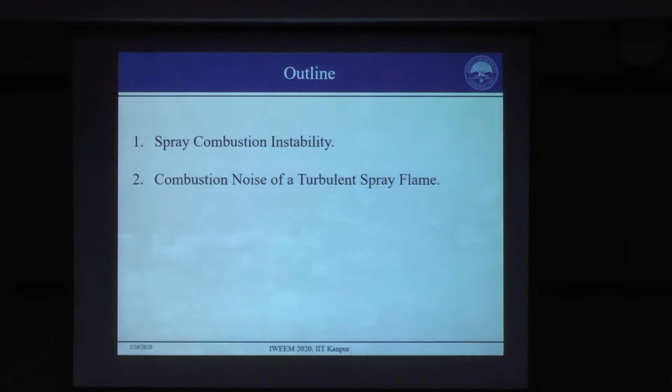So today I'll be talking mainly about spray combustion instability. And if time permits, I would like to slightly touch upon the topic of direct combustion noise from turbulent spray flames. So I'll give you a brief background on our research.

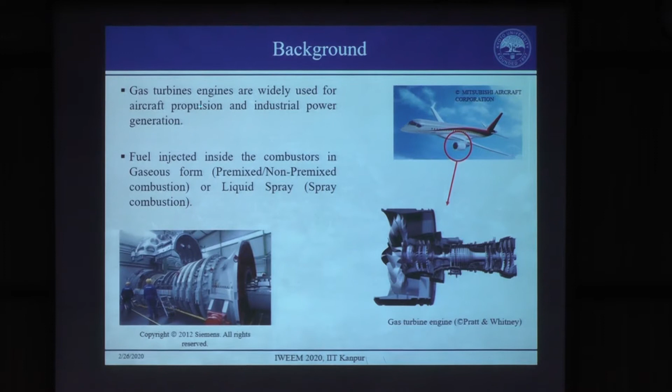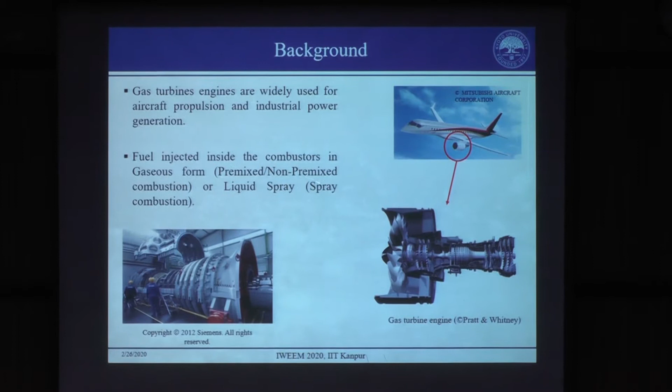As you might be aware, gas turbine engines are used for applications of propulsion and power generation. In the combustors of these gas turbine engines, you can inject fuel in a gaseous form, leading to premixed or non-premixed combustion, or you can directly inject liquid fuel as a spray. But when you have turbulent combustion inside the combustor, it is often accompanied by what we call combustion noise, which is a byproduct coming from the heat release rate fluctuations occurring inside the combustor.

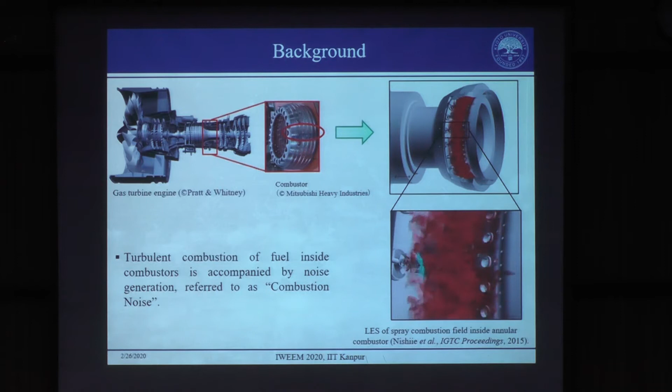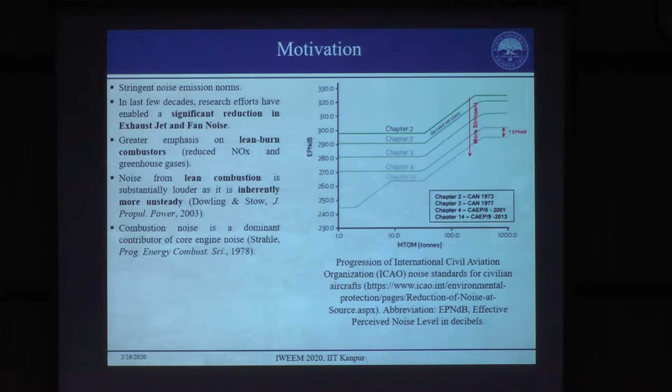Another issue is that, to keep in line with these norms, researchers have invested a lot of research to reduce the other noise sources from engines, like the jet noise and the turbo machinery noise, such as fan noise. A lot of research has been done to drastically reduce these noise levels.

This problem is further aggravated by the introduction of what we call lean burn combustors, because we want to reduce NOx and other emissions. So we introduced these lean combustors, but the problem with lean combustion is that it is inherently more unsteady, and it leads to more noise.

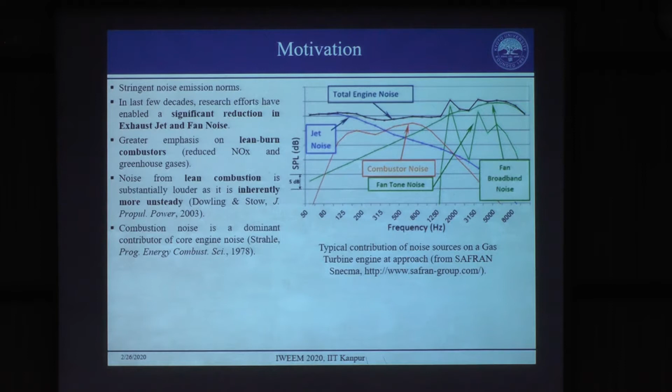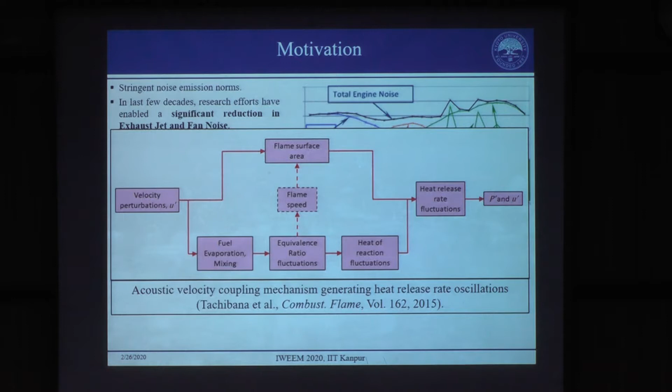And it's not just the noise. The problem arises when you have a coupling between the acoustics of the combustor and the heat release rate fluctuations. Here I've shown a schematic which shows the two pathways by which the coupling can occur. Once there is a suitable phase relation between the heat release rate fluctuations and the pressure perturbations, the self-excited oscillations will grow and lead to what we call thermoacoustic instability or combustion instability.

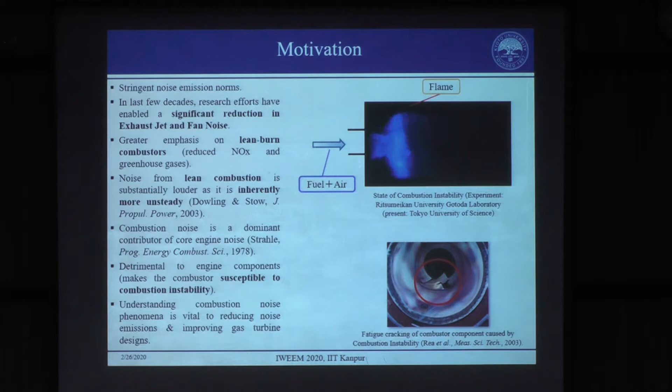This is dangerous. Once this starts occurring, there's loud noise at discrete tones, and the vibrations caused by this can actually damage your combustor components. So this is why we need to investigate the mechanisms behind this.

But today, what I'll be showing you is our attempt at understanding how the fuel flow rate fluctuations influence the combustion instabilities in a backward-facing step combustor configuration.

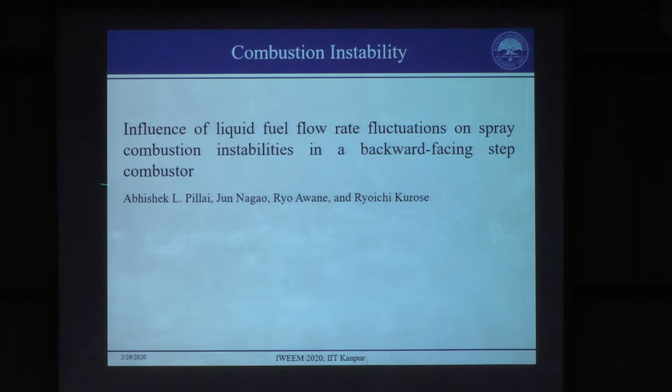The schematic of our setup is shown here. We have the fuel spray, which is injected through many ports - in this study we have used 7 ports through which fuel is injected. The flow rate fluctuations are taken into consideration using a model, which I'll introduce soon. Then you have the air coming in like this, so it's a typical cross-flow configuration, and the flame is formed behind the step. We want to see how the fluctuations in the flow rate will affect the combustion instability in this case.

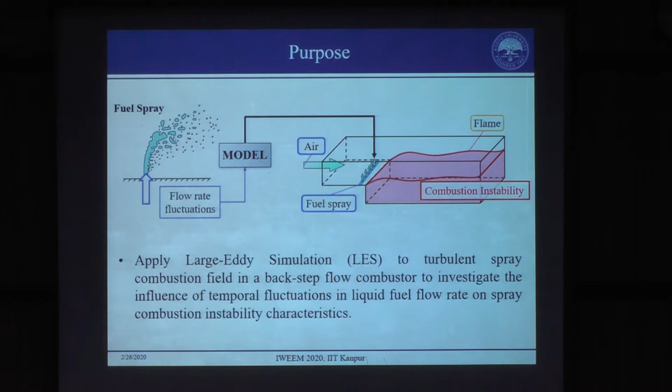So this is the computational domain and conditions for this study. You can see this is the entire domain. You have a plenum section followed by an inlet duct, so the air flows in through an opening into the plenum and then goes through this inlet duct and is introduced inside this combustor. So the combustor is zoomed in over here.

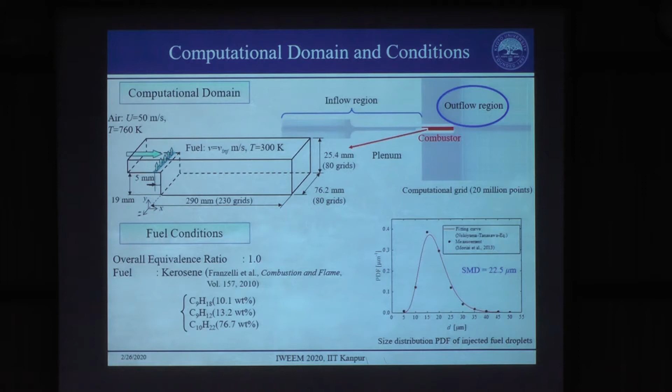So you have the fuel coming in vertically, injected upwards, and the cross-flow air coming in. The fuel conditions here maintain a global equivalence ratio of 1, and the fuel used is kerosene. We assume that when the fuel is injected from these ports, a spray is already established. The droplet size distribution is given by this Nukiyama-Tanasawa PDF, which is fitted to a previous experiment on a real gas turbine combustor performed by Moriai et al.

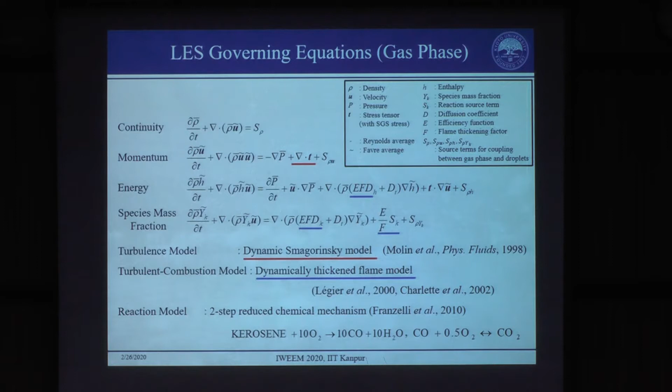So these are the typical LES governing equations that you might be familiar with. We are solving the filtered equations of continuity, momentum, energy, and species mass fractions. To take into account the subgrid turbulence, we use this dynamic Smagorinsky model. For the turbulent combustion model, we use this dynamically thickened flame approach. There are some source terms in each of these equations, to account for the phase coupling between the dispersed phase and the gas phase. For the reaction of the kerosene fuel we use a two-step reduced chemistry to keep computational costs realizable.

These are the governing equations for the dispersed phase. The gas phase is treated as an Eulerian continuum, while the droplets are solved in a Lagrangian framework, and the position, velocity, temperature, and mass of each individual droplet is tracked. The evaporation of these droplets is considered using a non-equilibrium Langmuir-Knudsen model.

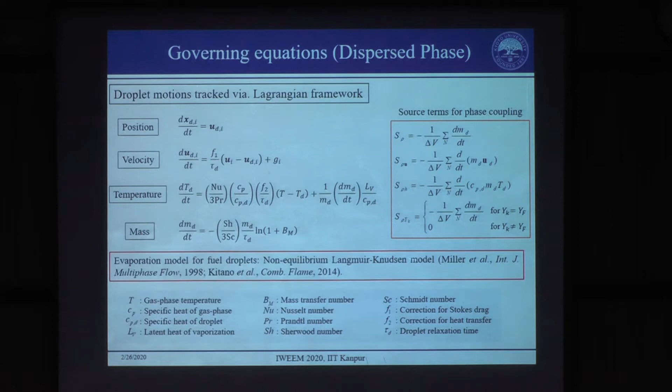So this is the model that we use for the flow rate fluctuations. We call it the variable mass flow rate model. It is a simple model derived from Bernoulli's principle. The fuel injection velocity is a function shown like this, where this P naught is the injection pressure, the summation of the average pressure. Initially all these simulations have been performed for an average pressure of 1 atmosphere, plus the pumping pressure, which is given by this equation.

You can see there's another term, the instantaneous pressure, so this P now minus some phase difference term. This is the pressure at the time instance T now, and we are applying a phase shift to this model. This phase shift basically means you are creating a lag, creating a phase difference between the fuel injection variation and the pressure oscillations occurring inside the combustor.

So ideally, with this kind of model, if the injection pressure P naught is larger than the pressure P measured just outside the fuel injection port, we will have some fuel injection given by this velocity. But when the outside pressure becomes larger than the injection pressure, ideally the fuel should be cut off—think of it as a non-return valve. But in this case we still inject a small quantity of fuel using this velocity V min. The purpose is that over one cycle of pressure oscillation, we wanted to maintain the global equivalence ratio at 1, so we used this very small injection rate to keep the equivalence ratio at 1.

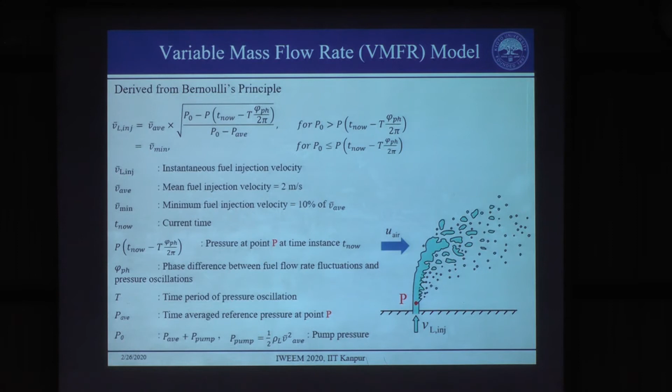So we investigated 5 cases, named NA1 to NA5. In the first case, we don't apply the model—it's just a constant fuel injection rate, the case where you have some combustion instability occurring without this model. Then we start applying the model from case NA2 to NA5, and the difference is we start increasing this phase shift. In case NA2, we apply the model but keep the phase shift between the fuel flow rate variations and the pressure oscillations at 0, then we start increasing it slowly to 90, 180, and 270 degrees.

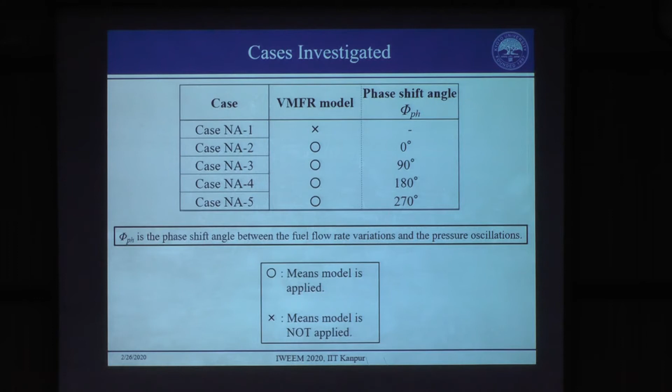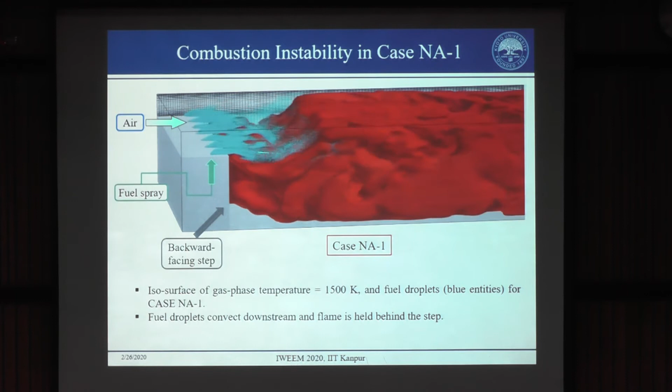So first I'll show you the results for the case NA1 where the model is not applied. You just have a constant fuel flow rate coming in from all these ports. You can see a periodic large vortex is generated behind this step, and the flame is stabilized in this recirculation zone. You can also see the droplets, represented by these blue entities, flowing downstream, dispersing, and the droplet count is reducing as you go downstream because of evaporation and combustion. This red isosurface that you see is the gas phase temperature at 1500 Kelvin.

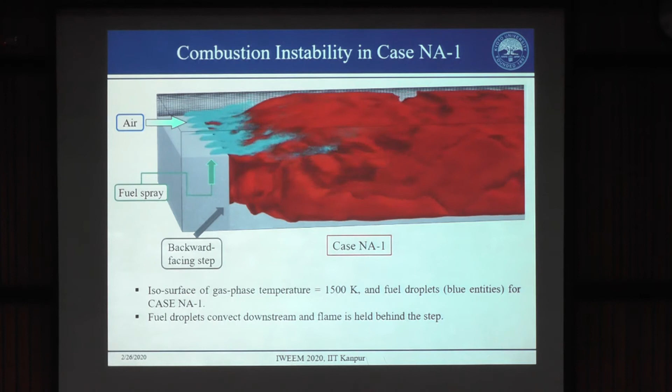So then we confirm what kind of fluctuations are happening. We look at the pressure fluctuation, which is the pink curve, and then this is the heat release rate, the blue curve. This is the total heat release rate fluctuation within the combustor, and m dot, this green line, is the total evaporation rate, and this is the velocity. This is actually the cross-sectional average velocity at the dump plane, which is also fluctuating. You can see there is a phase difference of pi/2 between the pressure oscillations and the velocity oscillations.

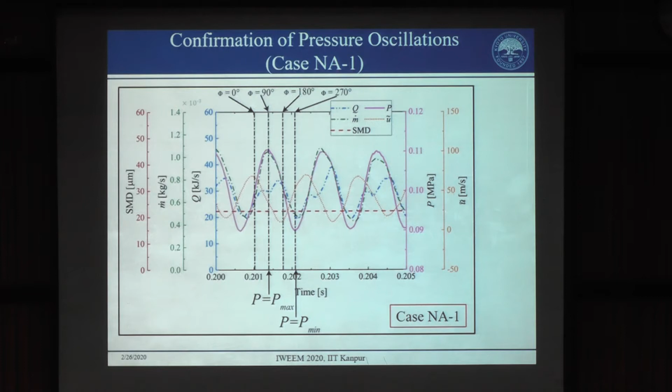So next, I'll talk about the cases where the VMFR model is applied. Here, from case NA2 to NA5, we start applying this phase shift between the fuel flow rate fluctuations, shown by the black line, and the pressure oscillation. When the phase shift is 0, it's as we expect. When the pressure above the fuel injector is low, you get some fuel injection. This is the fuel injection period, and as soon as the pressure becomes high in the combustor, ideally it should be 0, but we are giving a small flow rate to keep the equivalence ratio at 1.

And then as we increase the phase shift, you can see it starts showing up in these curves. The phase shifts match the applied values: 90, 180, and 270. Another important observation is that for case NA2, the pressure oscillation amplitude is not so strong - it's a weak combustion instability. But as we start increasing this phase shift, you can see the amplitude starts increasing.

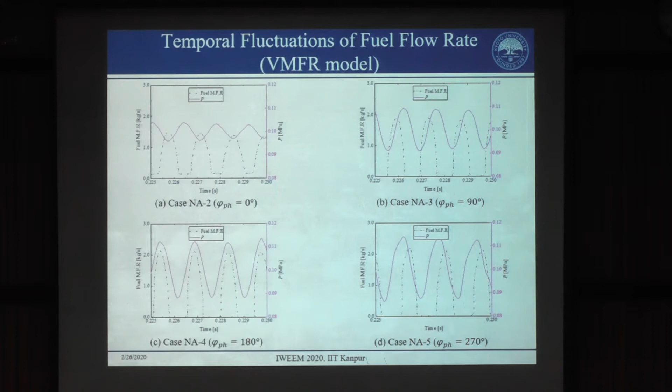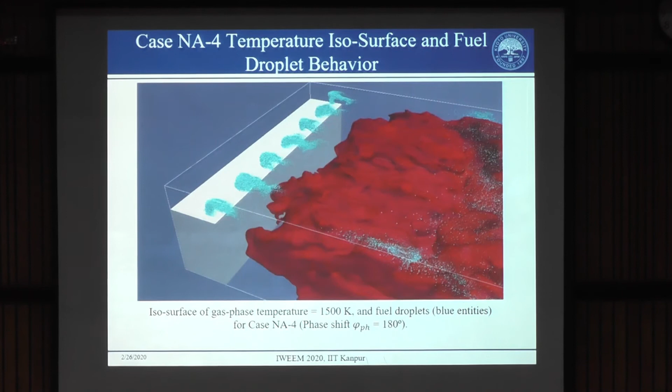So I'll show you the animation for case NA4 so you can have an idea of how the fuel injection is varying. You can see there's a strong recirculation happening here, and the fuel injection period starts, and then it cuts off. Again it starts and cuts off. This is based on the injection period and the injection rate, based on this model that we are applying and the phase shift that we are applying between the flow rate, the fuel flow rate, and the pressure oscillations.

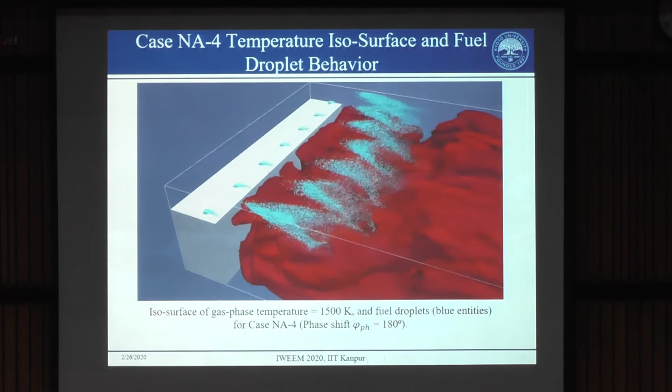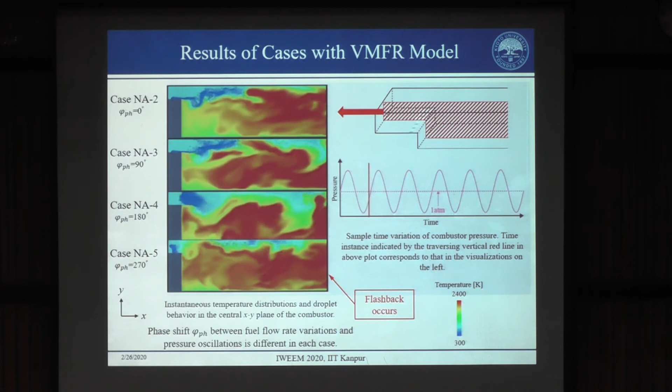As expected, when you apply that model with zero phase shift, you can see a drop in the pressure oscillation intensity, which is expected - we saw very weak oscillation. Then as we start increasing the phase shift, the pressure oscillation intensity starts rising.

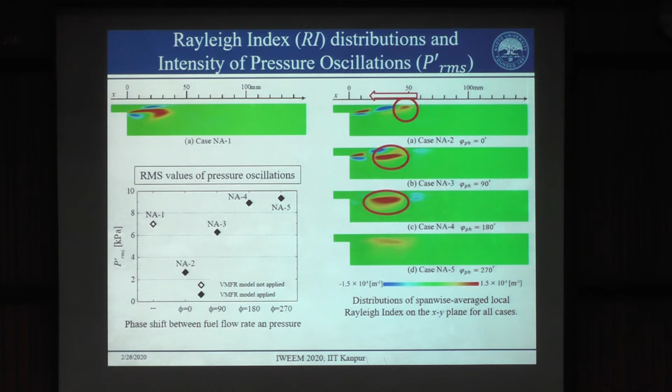This is also one of the peculiar features that we found. We want to know why these positive regions of Rayleigh index move upstream, so for that we looked at...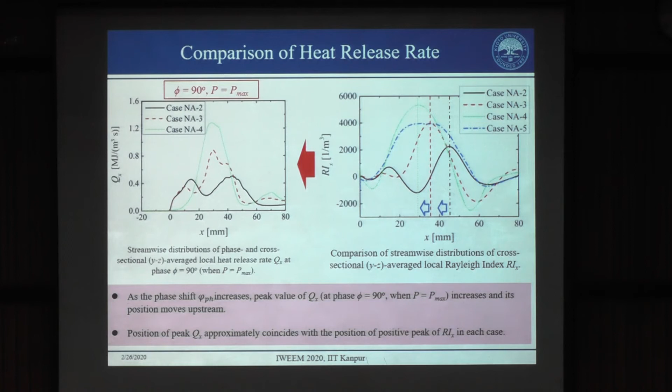Mind you, this range is not the same, but the peak is moving a bit upstream as we increase the phase shift between the fuel flow rate fluctuations and the pressure oscillation. The reason why the heat release is moving upstream will depend on the spatial distribution of the heat release rate.

This depends on the spatial distribution of the mass of the gaseous fuel at a phase or time instance immediately beforehand. That's why we look at the streamwise distributions of the phase-averaged local fuel mass—this is the evaporated fuel that is available.

You can see again it shows the same tendency for the evaporated fuel: as the phase shift increases, the peak value of the evaporated fuel is also moving upstream. This is shown for a phase of phi equal to 0, which comes before this phase.

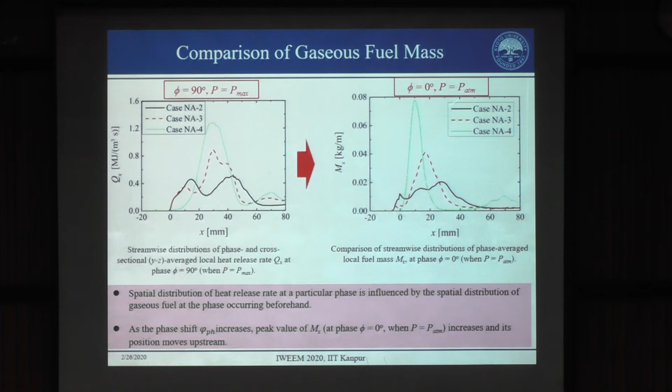At this instance, if you look at the pressure oscillation, P is equal to atmospheric pressure. If we look at the reason for this tendency in the local fuel mass, we look at the evaporation rate, because the amount of fuel available depends on the evaporation rate at the phase before this phase.

We can see similar tendencies happening there. As I said before, as we increase the phase shift, there is, especially in case NA-4, a localized peak in the evaporation rate.

This is precisely the reason I cited before: when the fuel injection period occurs, the inflow air velocity is very low, which gives enough residence time for these droplets to pre-vaporize. That's why near the dump plane you see a very high evaporation rate, and then the evaporated fuel in the next phase is shown here.

So that's the chain of events that leads to the strong, positive flame index that we saw earlier.

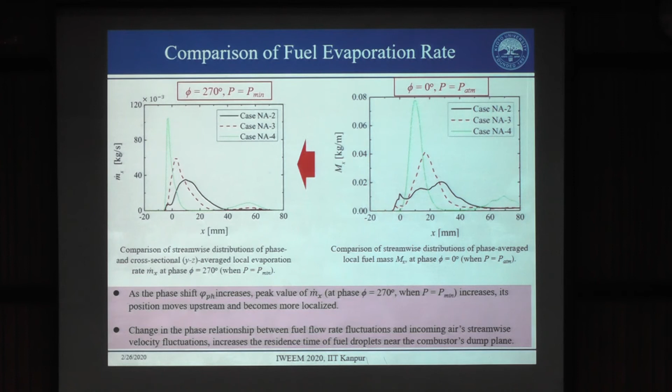This again explains why, when the fuel injection is starting, the velocity of the incoming air is decreasing, which increases the residence time.

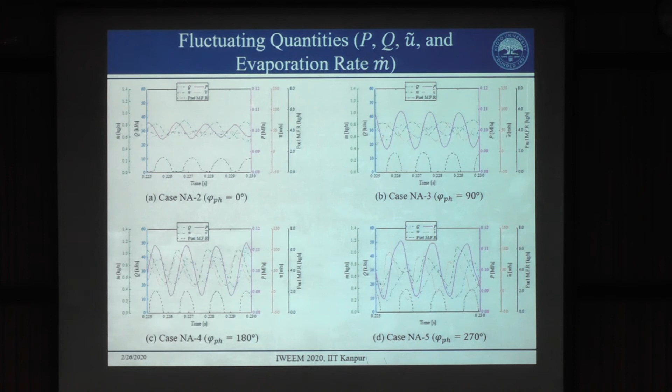To conclude, we used LES to study the turbulent spray combustion field in a backstep flow combustor, and investigated the effect of temporal fluctuations in the fuel flow rate on spray combustion instability. For that we proposed this simple VMFR model, and found that the temporal fluctuations of the liquid fuel flow rate create a strong influence on combustion instability intensity, and as we increase the phase shift between the flow rate and the pressure oscillation, the combustion instability became stronger.

Also, as we increased the phase shift, we saw that the heat release rate near the dump plane also increased, as a consequence of the increased fuel droplet residence time and the subsequent localized increase in fuel droplet evaporation rate. This strengthened the correlation between heat release rate fluctuations and pressure oscillations.

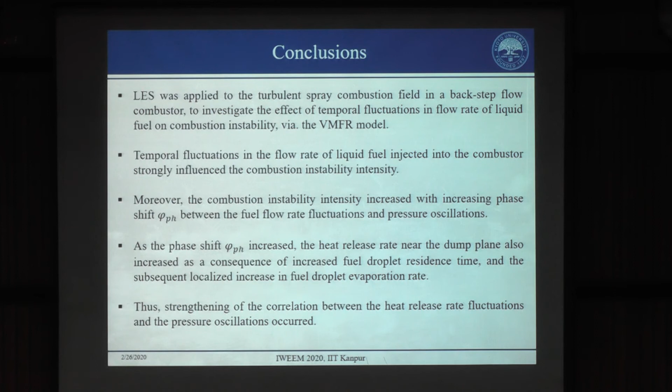How much time do I have? A couple of minutes. I wanted to talk about combustion noise, but since I'm running out of time, I have only 2 minutes, is it? Okay, I think I'll conclude, but just a moment—maybe I can just show you.

So we are also doing studies on combustion noise. What we do is apply a hybrid CFD-CAA coupling approach, where you solve the reactive flow field of the flame using CFD, like either DNS or LES.

I performed the DNS, and from the DNS solution you get some source terms, acoustic sources, which can then be used. They are transported from the DNS mesh, interpolated to the CAA mesh, and then in the CAA solver you can use different strategies.

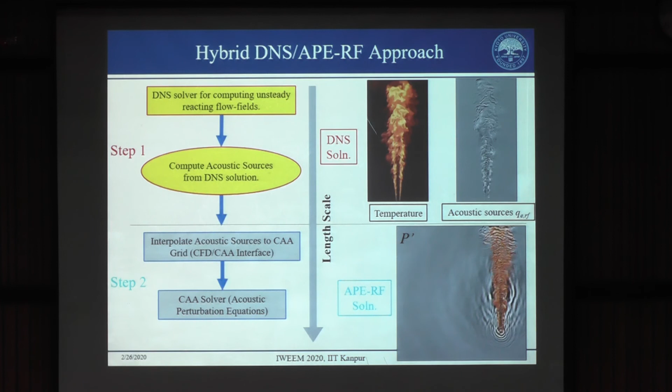I use the acoustic perturbation equations to solve the propagation of noise, shown here. You have the acoustic sources, which are the orange contours, and the grayscale showing the pressure perturbations.

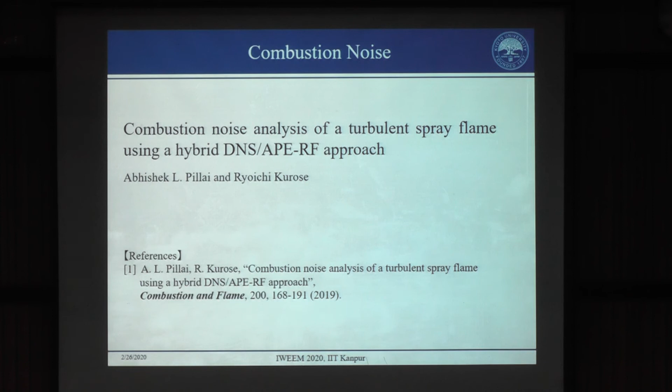That concludes my talk. Thank you very much for your attention.

But we do want to investigate this issue, as you pointed out. So as a next step, we want to apply the flamelet approach. We found that when we looked at the flame index of all these cases, the combustion is mostly premix. So we can try to incorporate some kind of FGM and see whether the results change or not. We are in the process.

Effects on the emissions due to instabilities, is there any future work you are planning to do on that? Well, at the moment we have no such plan for the emissions, but if there is something, we can talk about it. Thank you.

My name is Gunbir, I'm from the Mechanical Engineering Department. I wanted to ask what is the role of choosing a non-equilibrium evaporation model as compared to an equilibrium evaporation model? And does it have any link to the heat release rate fluctuations which you are observing?

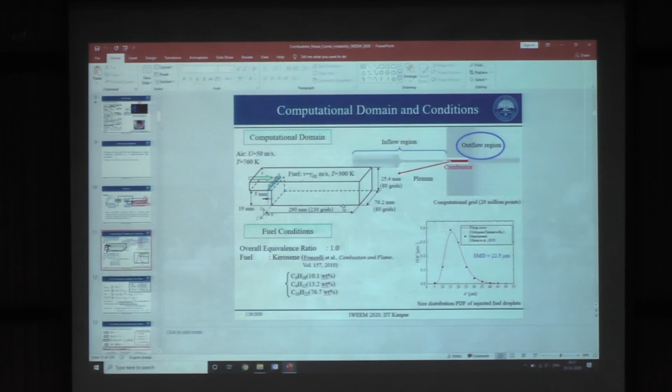Yeah, so the reason is because the droplets, if you see the droplet size distribution, most of the droplets are less than 50 microns. So at a small size of the droplets, this non-equilibrium effect becomes important. So what I mean by non-equilibrium is the way it is modeled.

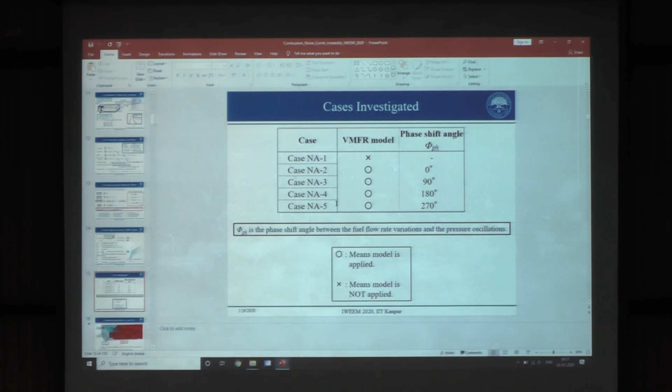Maybe I have a slide here, I'll show you the governing equations later. What it means is, depending on the amount of vaporized fuel on the droplet surface, its evaporation rate changes, and this is taken into account using the Langmuir-Knudsen model. So if the droplet was big enough, maybe you can do well with your equilibrium assumption, but at small scales, previous research has shown that the equilibrium model doesn't work well. So of course this will impact your heat release rate, because the evaporation rate decides how much fuel is converted into gas phase, and that will decide the local equivalence ratio and the heat release rate.

So we can discuss later, I can tell you more about the model. I can't find the slide here. So yeah, thank you very much for the question.

Hi Professor, this is Vignesh, I'm an MTech student here in the Aerospace Department. Can you please go to the slide where you show the FFT for case NA1? No. So...

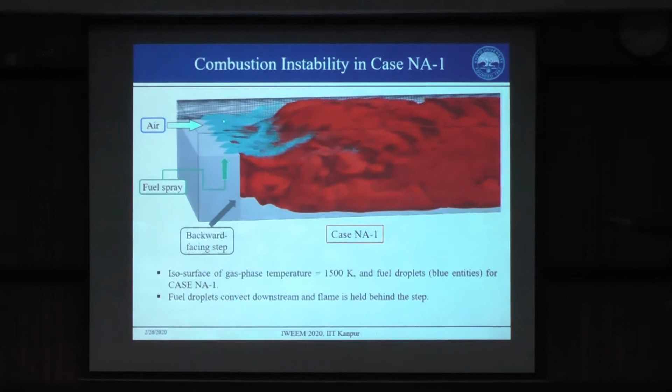My question is more of a doubt, at which point do you measure the time series? Sorry, I didn't mention, the pressure shown in all these graphs is measured at the dump plane. So dump plane means this location, the step location. You have the inlet duct and this is the combustor, right? So this is the dump plane, this cross section. We measure the pressure at a point just above this surface at the dump plane, so somewhere around here.

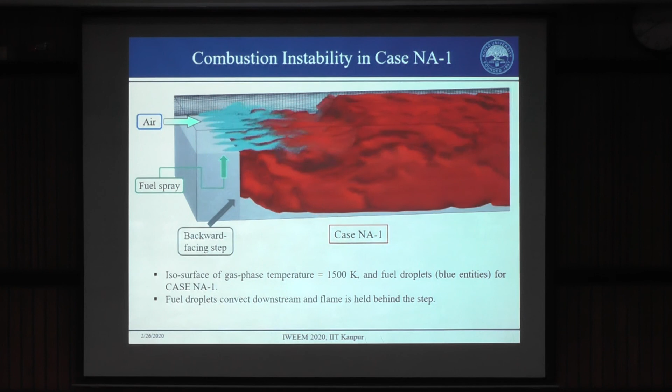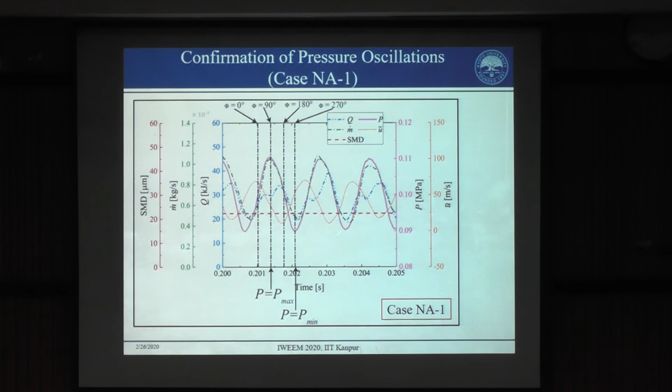Okay, and what was the vortex shedding frequency for this case? So it should be the same as this, right? Because if you see the velocity fluctuation, the frequency of the velocity fluctuations is almost the same as the pressure fluctuations. So it's the same.

It's the same periodicity. So you are saying it is around 600 hertz? Yeah, because the time scales in these simulations are very small, of the order of 10 to the power minus 7 seconds. So that's why it's an expensive simulation. Okay, thank you.